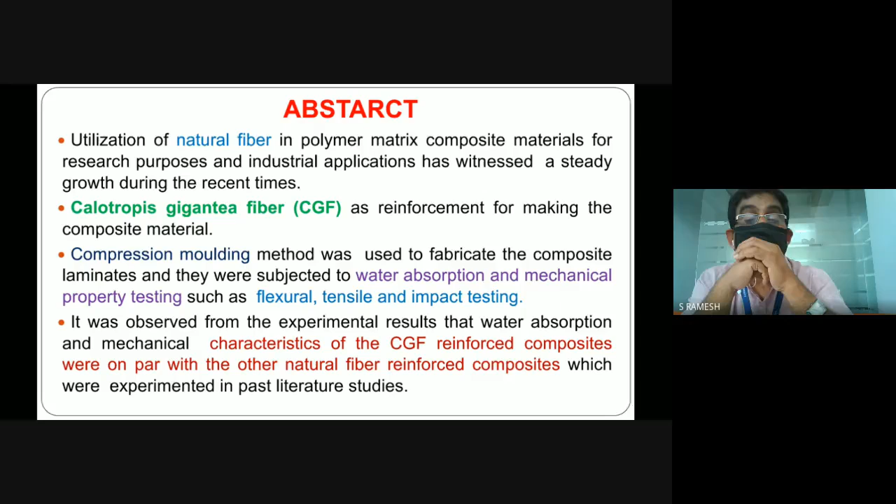In the compression molding method, we used to fabricate composite laminates that were subjected to water absorption and mechanical property testing, such as flexural, tensile, and impact testing. In this work, we take 4 tests: first the flexural, then tensile, and the impact test. For impact, we use the Izod impact test, and then we did the water absorption test.

What we observed from the experimental result is that the water absorption and mechanical characteristics of the Calotropis gigantea fiber reinforced composite were on par with other natural fiber reinforced composites experimented in past literature studies. In the introduction part, we discuss composites and what we are going to do.

Mainly we will take the Calotropis gigantea plant. From that we can extract 2 types of fiber: one from the bark fiber, and another from the seed fiber. Here we are going to take the Calotropis gigantea bast fiber.

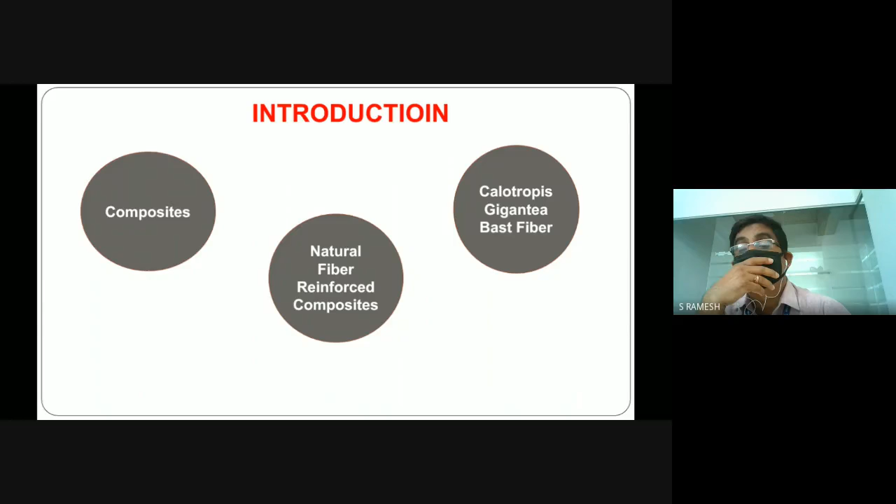And then we use LY556 epoxy resin and HY951 hardener. Why we choose this is because LY556 epoxy resin is a solvent-free resin, and it also gives a medium viscosity, which will easily penetrate into the fiber and give a better interfacial bond.

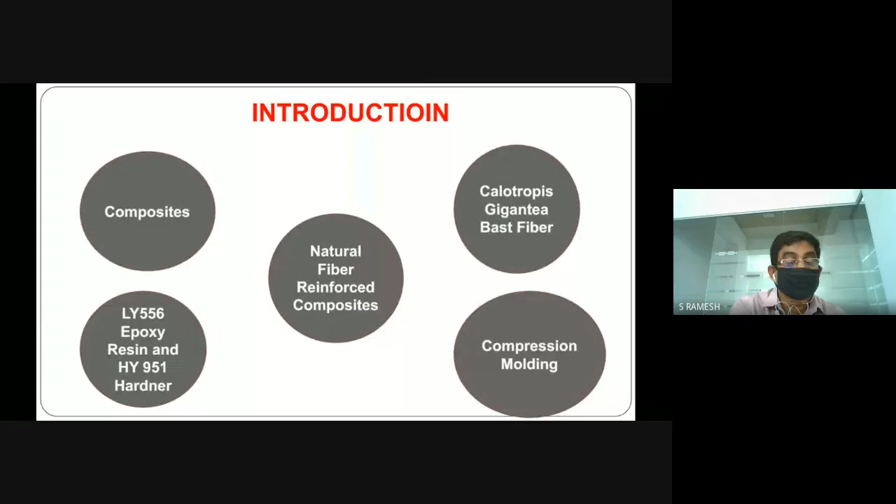We will take the HY951 hardener, which is able to get very high rigidity purpose, and mix it in a 10:1 ratio. Then we will go for compression molding. Most of the literature is done using the hand layup method, but we will go for compression molding to get a uniform load applied during fabrication throughout the entire composite laminate.

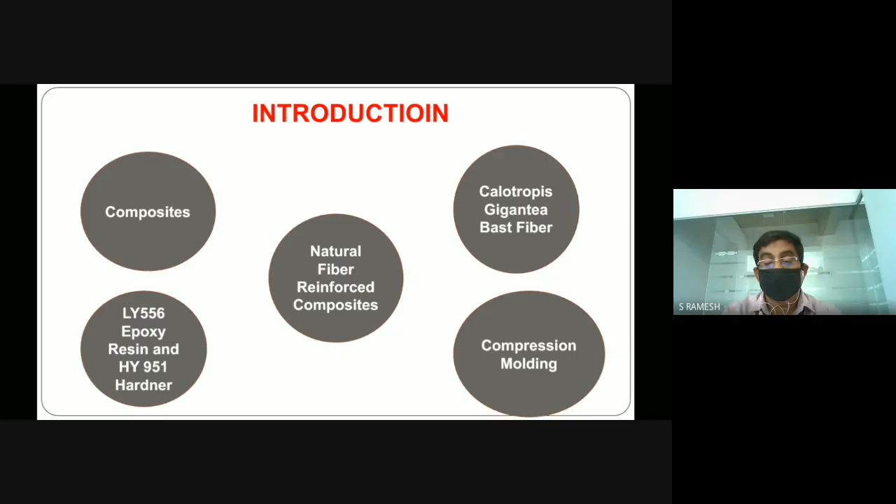Next, the flexural strength. As per ASTM standard D790, we prepared a specimen of length by breadth by thickness dimension of 125 by 12.5 by 3 mm thickness. We used a gauge length of 100 mm, applied a load cell of nearly 10 kilonewton, and the rate of loading is approximately 5 mm per minute.

Then for tensile strength, we used the ASTM D638-10 standard. We prepared a specimen dimension of 165 by 25 by 3 mm thickness, using a gauge length of 100 mm. We used a universal testing machine with a cross head speed of nearly 5 mm per minute.

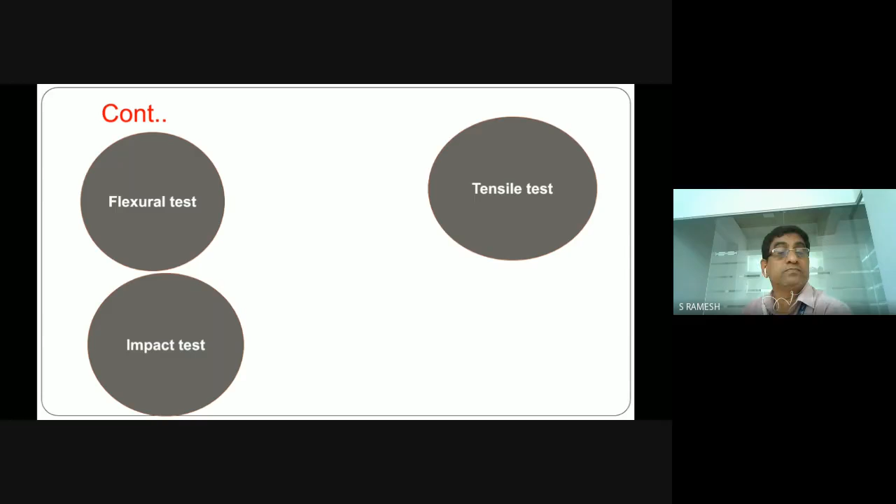Then the impact test. We used the Izod impact test, with the ASTM standard D256-10. The dimension of the specimen we prepared was 62.5 mm by 12.5 mm by 3 mm.

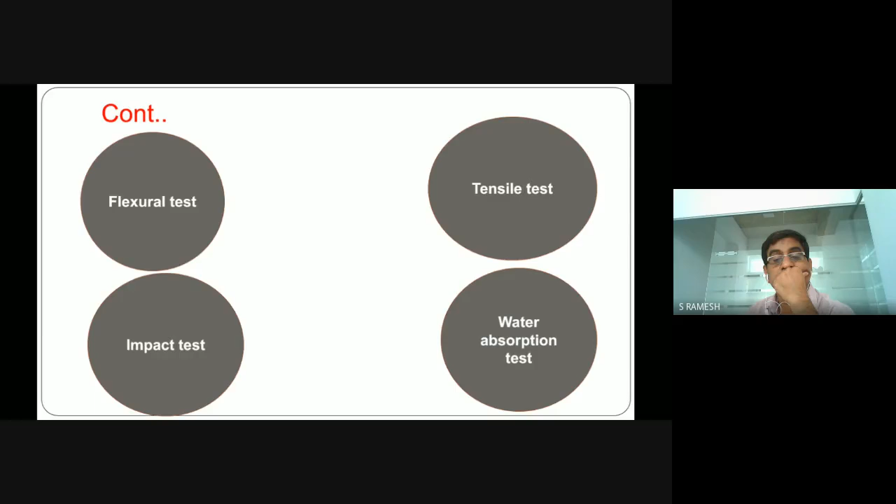Then we go for the water absorption test, using the ASTM D570 standard. We took an initial sample of 10 grams for the water absorption test. We calculate the water gain percentage as the ratio of wet weight minus initial dry weight, divided by initial dry weight, multiplied by 100. I will explain this elaborately during my experiment.

Next, the fiber extraction process. This is the Calotropis gigantea plant, which is available around Tamil Nadu. We chose it because it has least vegetative value and very low density, nearly 0.56 gram per cubic centimeter.

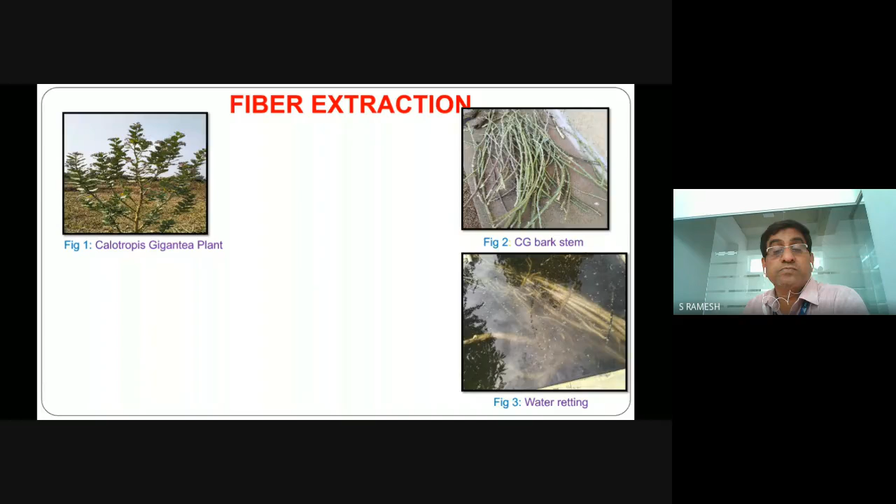We extract the Calotropis gigantea bark stem by removing the leaves and petioles to achieve the bark stem. Then we go for a water retting process to extract the fiber inside. We dip it in water for nearly 7 days, then take it for sunlight for 2 days. Due to this, water penetrates into the stem through capillary action, and the fibers come out slightly. Using a mechanical method, we extract the fiber after the water retting process, and finally we get a cumulative collection of Calotropis gigantea bark fibers.

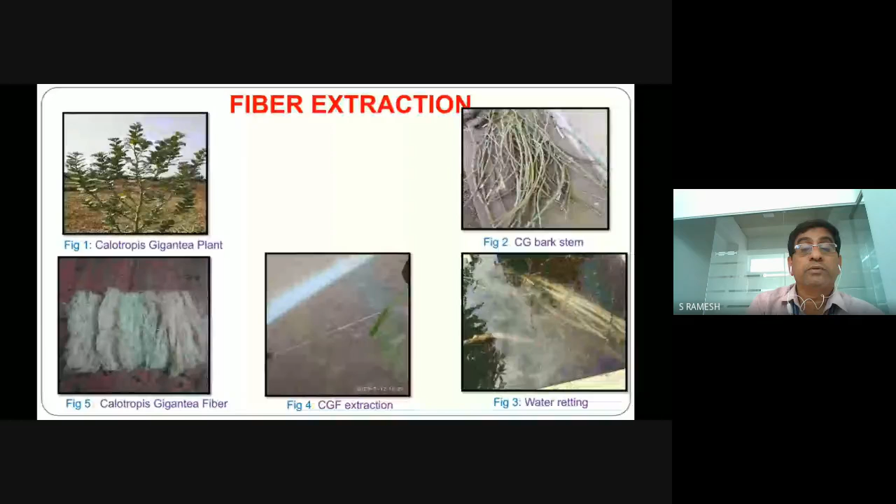Generally, from the Calotropis gigantea plant we can get two types of fiber: one from the fruit and another from the bark stem. For fabrication of composites, we used LY556 epoxy resin, which as I already told you is solvent free and has medium viscosity, along with the HY951 hardener, which has high rigidity. This gives us the final composite plate, achieved using a compression molding process.

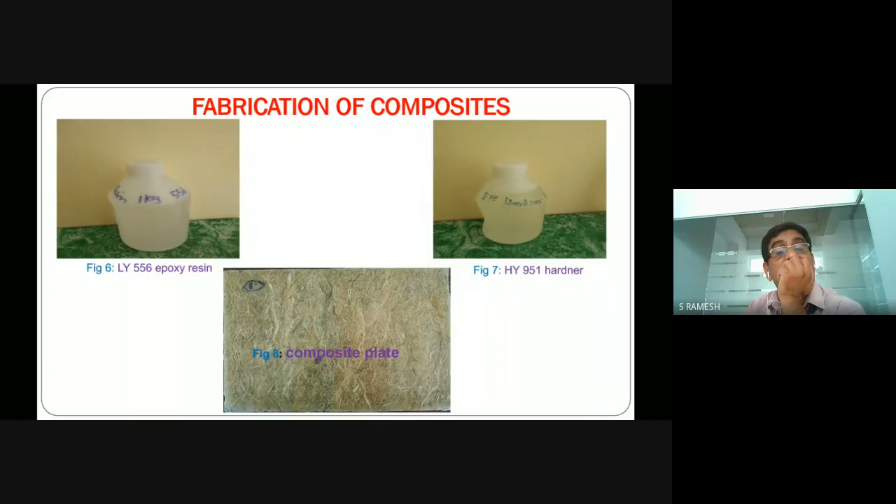This is a test result. First is the flexural strength and modulus of Calotropis gigantea bark fiber. Analyzing the figure, the flexural strength ranges from nearly 60 megapascal to 80 megapascal. Flexural strength is also known as modulus of rupture, defined as the stress in a material just before it yields in a flexural test. It normally ranges from 60 to 80 megapascal, as seen from the figure.

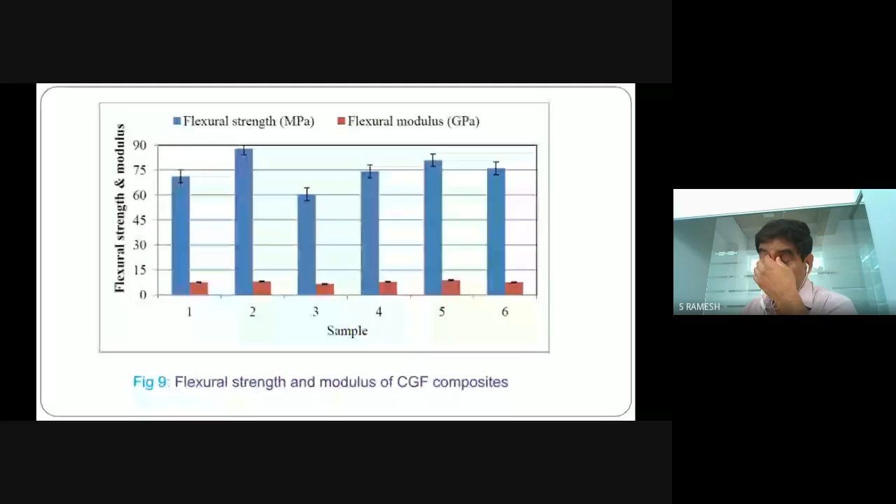When we look at the flexural modulus, it is nearly 6.55 gigapascal to 8.86 gigapascal. The flexural modulus is normally the bending modulus, an intensive property that is the ratio of stress versus strain under flexural deformation. The flexural modulus represents the tendency for a material to resist bending.

In the analysis, we will take nearly 6 samples. For tensile strength and modulus, the tensile strength varies from nearly 41 megapascal to 58 megapascal, as observed in the graph. Tensile strength means the maximum load a material can support without fracture when stretched, divided by the original cross-sectional area of the material.

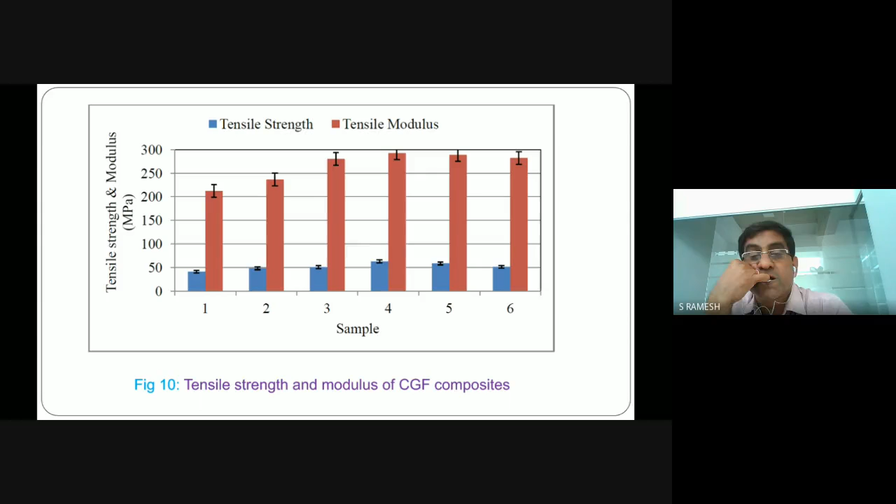For tensile modulus, we get nearly 212 megapascal to 292 megapascal. Tensile modulus is the ratio of stress along an axis to strain along that axis, where stress is force per unit area. We use tensile modulus to predict the elongation or compression of an object, as long as the stress is less than the yield strength of the material.

Next, we go to the impact strength. The highest impact energy observed by the Calotropis gigantea fiber composite is nearly 10.4 kilojoule per meter square, and the lowest impact energy observed by the Calotropis gigantea fiber composite is nearly 8.8 kilojoule per meter square.

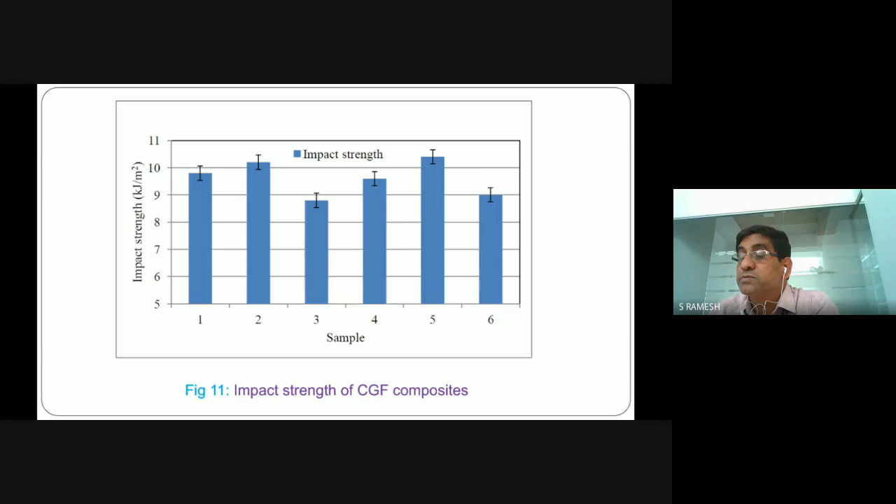In conclusion, the tensile strength and modulus were found to be better for Calotropis gigantea fiber composites due to enhanced load carrying capacity of the fiber. Second, the Calotropis gigantea fiber reinforced composite material exhibited better flexural strength and modulus, with values of 87.88 megapascal and 8.86 gigapascal respectively.

As already elaborated in the graph, the maximum impact strength recorded by Calotropis gigantea fiber composite is 10.4 kilojoule per meter square. From the experiment, it is concluded that the rate of water absorption of Calotropis gigantea fiber is higher than the composite, mainly due to the hydrophilic nature of the fiber. Overall, Calotropis gigantea fiber reinforced polymer composites are efficient materials and substitutes well suited for various applications in domestic, automotive, and interior and exterior components.

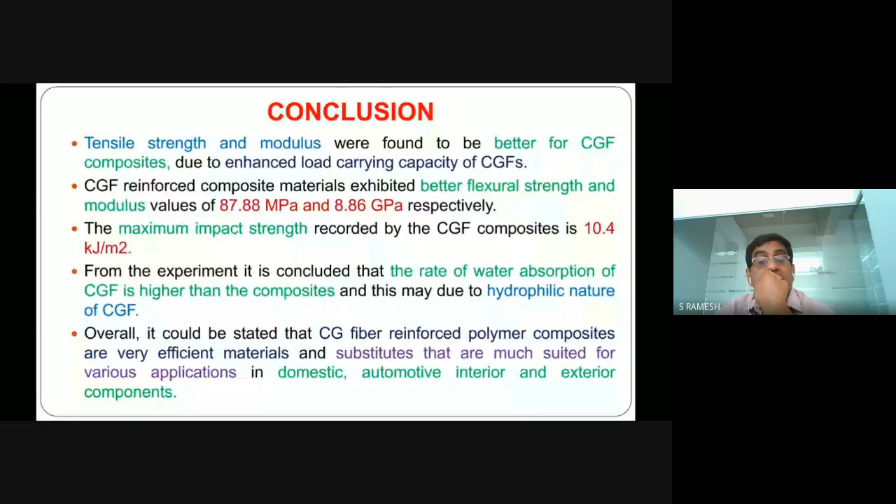These are the references we used.

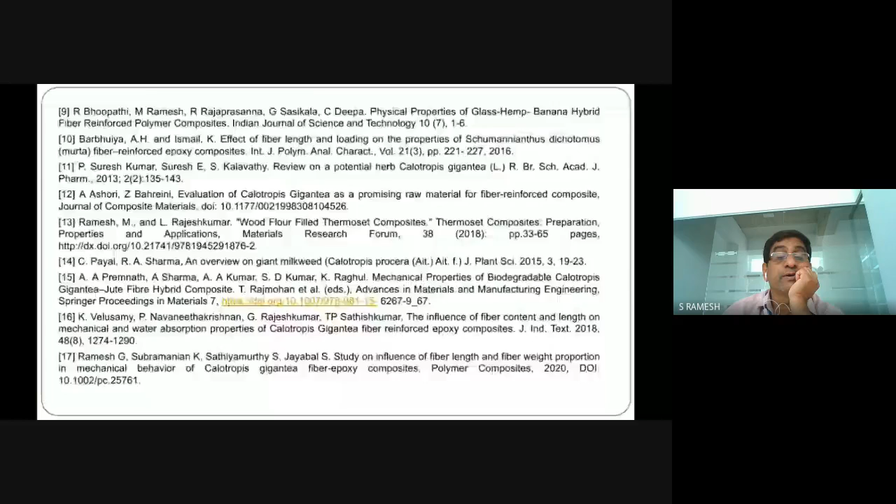Okay, Tamil Selvan. Yes, sir. Actually, go to the first page, first slide. Yes, sir. Abstract. No, the title. Here, actually, your name is Tamil Selvan and Ramesh is there.

Who is the real contributor for this work? Dr. M. Ramesh, sir. Okay, you are working in Kalyan Institute? Yes, sir, he's a vice principal. You are working as? An assistant professor, sir. What is your role in this work? I'm collecting the fiber, extracting the fiber, sir.

Okay, then I want just a simple thing: the water absorption test. So how do you conduct the water absorption test? Just for the people attending this session, can you tell them what water absorption is and how to conduct the water absorption test?

In the water absorption test, we use a water absorption tester machine. We take nearly 72 hours as the total water absorption time, and we record it every 4 hours. I will tell you in detail how to calculate water absorption from the graph.

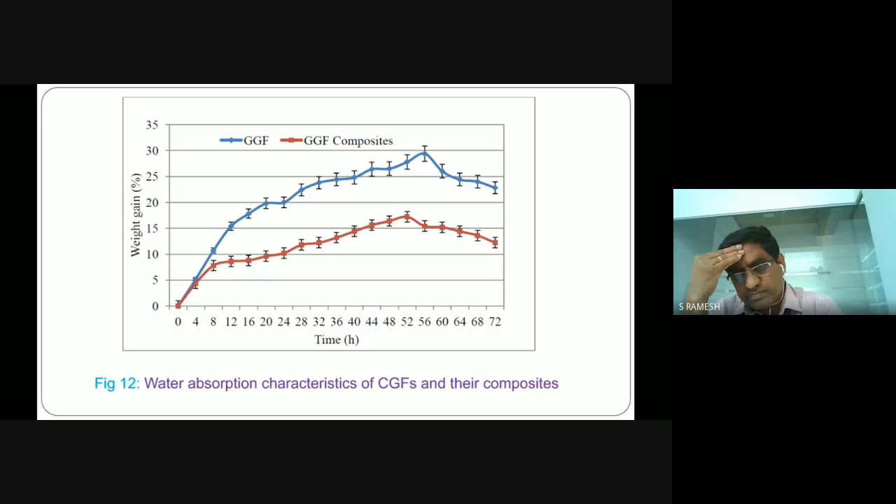And then we will calculate the wet weight and subtract from the initial dry weight, and we will get the weight percentage. This is actually the weight added in the composite. How much water is absorbed, and what's the capacity of water absorption? We have to calculate it as a volume fraction.

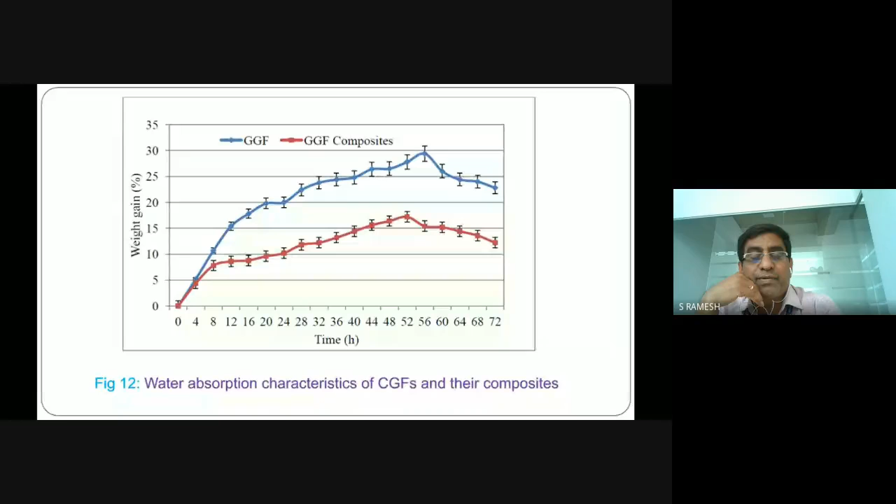If water contamination is added to the material, there is a possibility of other failures. Have you concentrated on those other failures? It may give strength, which is good, but at the same time, it may damage other functionality of the composite.

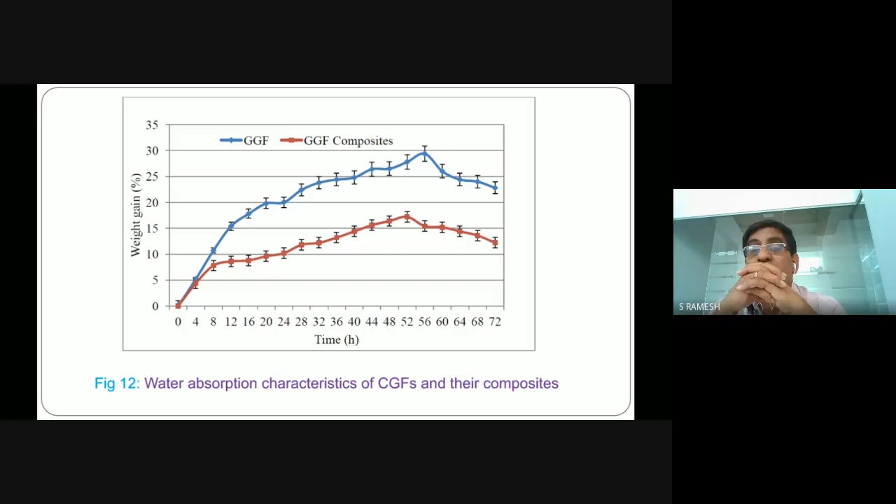When we talk about natural fiber composites, the tendency of the fiber is hydrophilic in nature. Mainly due to this hydrophilic nature, it absorbs more water molecules compared to normal glass fiber or silica fiber. So this is one of the drawbacks of fiber composites. We are trying to overcome this in further studies using sodium hydroxide treatment, a surface treatment.

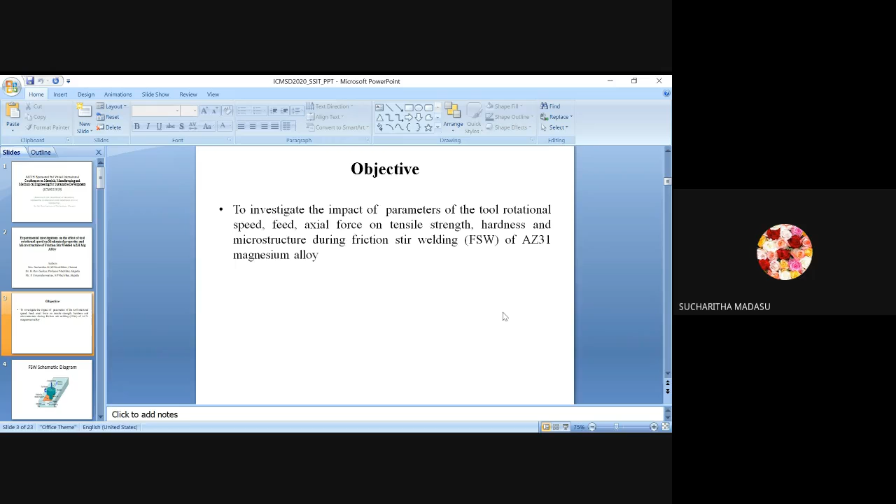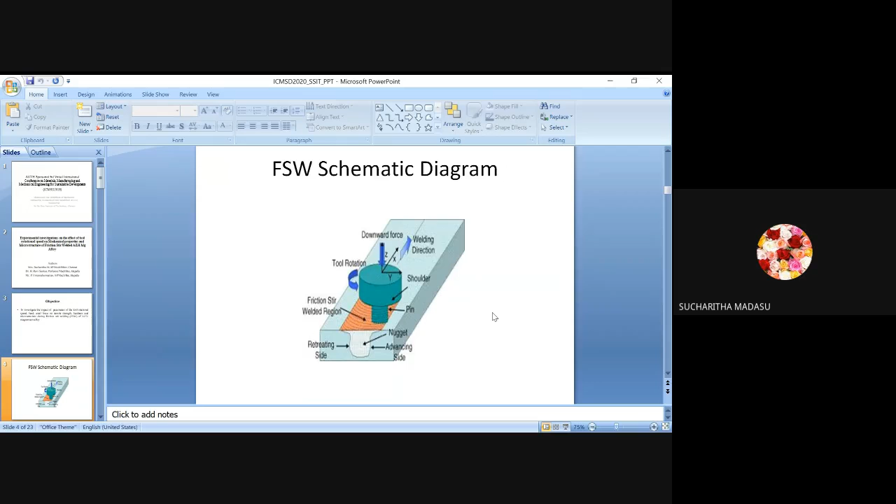This is the general diagram for FSW, friction stir welding. Here, the tool moves on the base plates so that friction develops between the tool and workpiece, causing temperature distribution on the surface of the plate, and the welding happens. So this is the general introduction - the friction developed between the tool and workpiece.

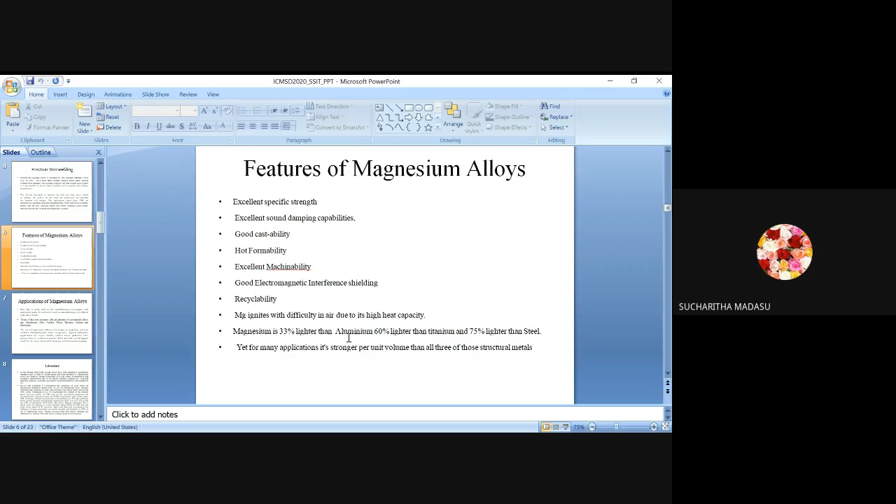Here I have taken magnesium alloys. Friction stir welding is used for all lightweight alloys. Much work has been done on aluminum alloys, so I have taken magnesium alloy as MG AZ31. General features of magnesium alloys: excellent specific strength, excellent sound damping capacity, good castability, hot formability, excellent machinability. Using all these points, we can replace aluminum alloys with magnesium alloys.

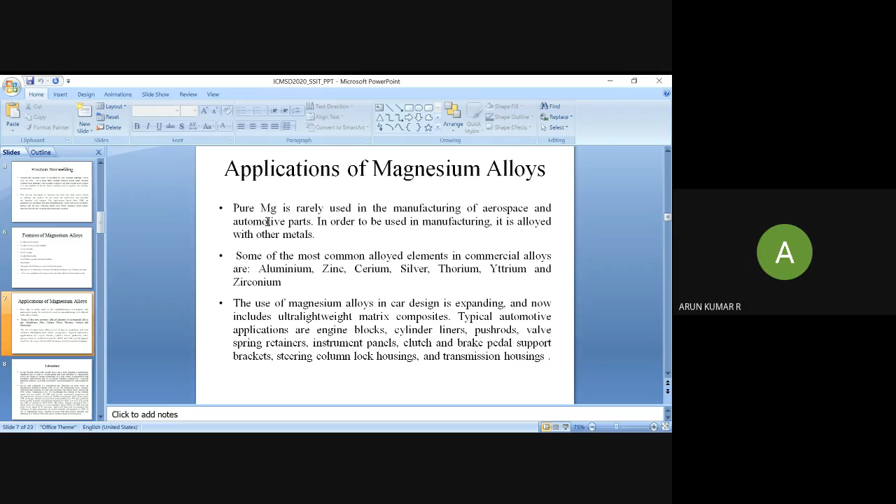So applications of magnesium alloys - please enlarge your screen ma'am, your screen is not that big, please slideshow. Is it okay sir? Yeah, fine, thank you.

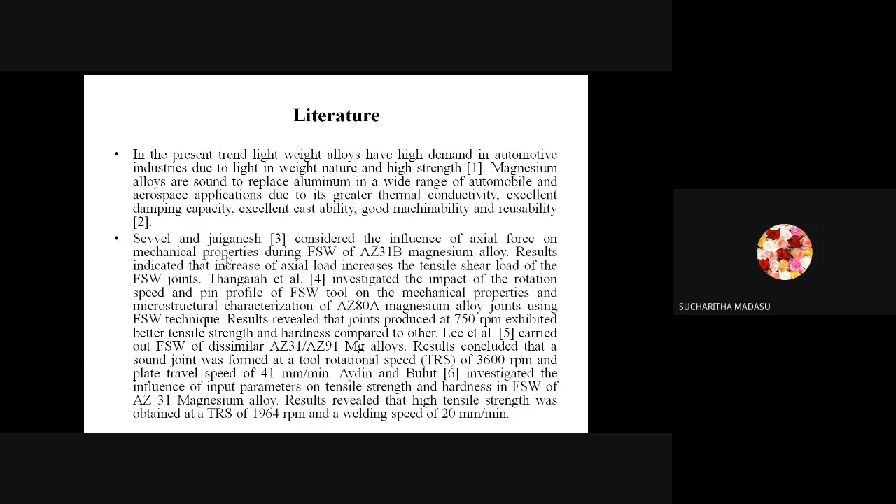So coming to my experimental details, here I have taken the tool as H13, and the tool dimensions I will show you. The pin diameter is 6 mm, the shoulder diameter is 18 mm, and the material I have selected is AZ31.

For this, the welding parameters I have taken are tool rotational speed as the only variable. Three different tool rotational speeds I have taken: 900, 1120, and 1400. The feed, axial force, and tilt angle are all constant: feed is 30, axial force is 5, and tilt angle is 1.

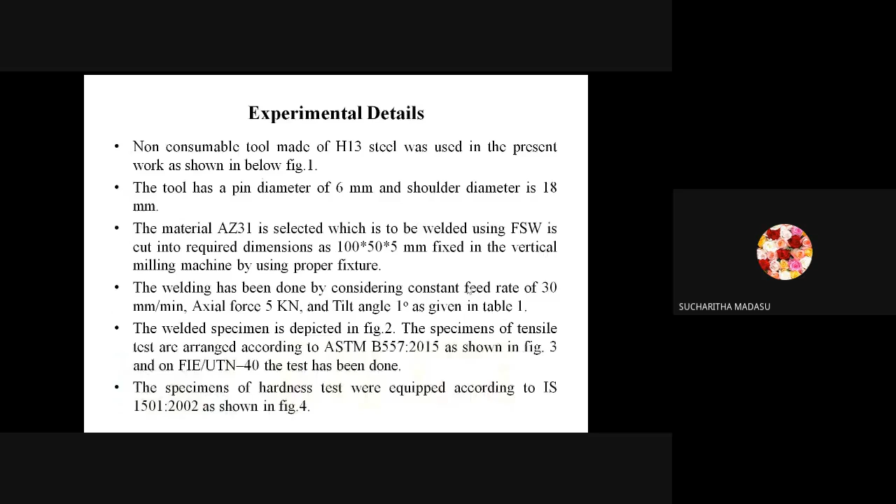After performing the tensile test on specimens at 900, 1120 and 1400 RPM, with constant feed rate 30 mm per minute and constant load 5 kilonewtons, I already have given that diagram. At lower tool rotational speed, TRS of 900 RPM...

Ultimate tensile strength of the joint is low due to lower heat input per unit length. Actually, the friction developing between the tool and workpiece, as the rotational speed increases, the temperature distribution on the surface of the plate also increases. So at lower speeds, the tensile strength we are getting is low.

At higher speeds, more than 1400, again the tensile strength gets decreased. Why? Because proper heat distribution should be there on the surface of the workpiece. So at a tool rotational speed of 1120 RPM, ultimate tensile strength of the joint is high and joint efficiency is also more.

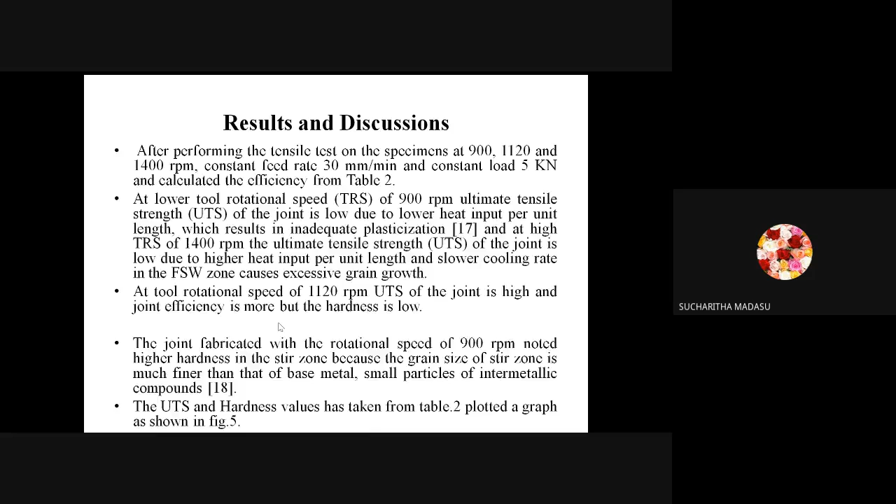And every area exhibits distinct capabilities of microstructure depending upon the thermal and mechanical situations. Actually, if proper temperature or thermal conductivity is appropriate, or proper distribution is there on the surface, there is no question of intermetallic compounds forming.

When the cooling rate increases, meaning when the tool rotational speed is reduced, intermetallic compounds will form. At that time, when we do the hardness test, hardness also gets increased, as I have shown in the values: at 900, 66.2; at 1120, 64.9; at 1400, 65.5.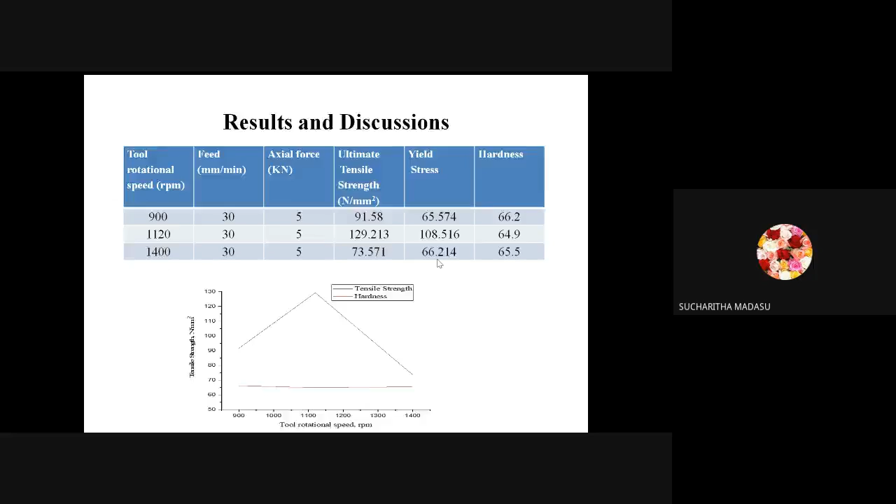And here, the thermomechanically affected zone, where the combined outcomes of thermal and plastic deformation have been energetically composed of the unique dendrite grain shape. Where the temperature distribution is proper, we can get the dendrite grain size, and the ultimate tensile strength also will be more because of the grain size.

The unique dendrite shape has completely disappeared. Actually, when starting the friction stir welding, the tool pin, which we have taken as 6 mm diameter, fully merges with the workpiece. So if we use more speed, the pin may vanish.

And here I have taken some analysis, for 900 as well as 1120 only. Why? Because at 1400 I got very low tensile strength, so I have gone with 900 and 1120. Actually at 1120 I got good tensile strength and good microstructure, with dendrite grain size as already informed.

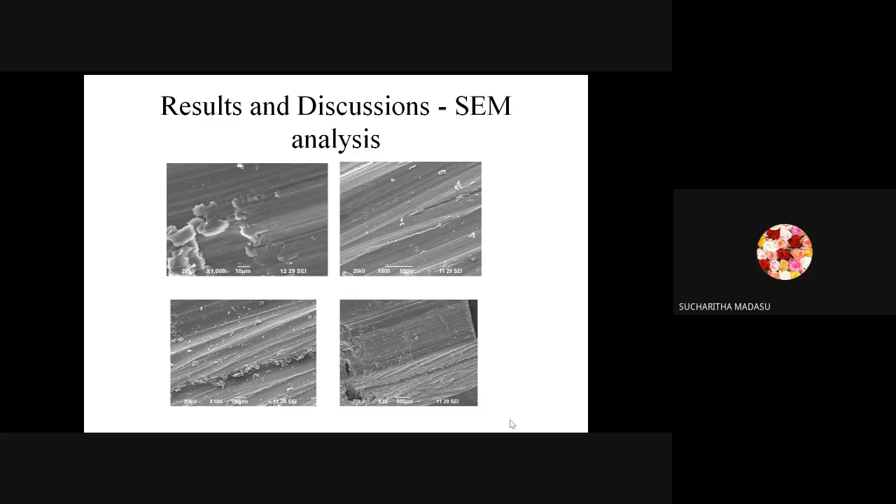I have taken this EDAX also, energy dispersive X-ray analysis, showing aluminum, magnesium, intermetallic compounds, and ferrous oxide. Ferrous oxide and aluminum-magnesium compounds peaked at a tool rotational speed of 1120. The intermetallic compounds have a needle shape, causing increased stress concentration, which at higher speeds may lead to loss of strength.

The higher rotational speed causes release of stored material to the upper surface. This happens during friction stir welding and produces micro voids in the stir zone, which may be one reason for lower tensile properties, as discussed for both 900 and 1400 RPM. Joints at lower rotational speed of 900 result in lower tensile properties due to lack of stirring and lower heat input, which occurs when the tool rotational speed is less.

It is observed that the joint fabricated at a tool rotational speed of 1120 RPM exhibited higher tensile strength. This may be due to optimum heat generation, which is sufficient to cause free flow of plasticized material and adequate mechanical work.

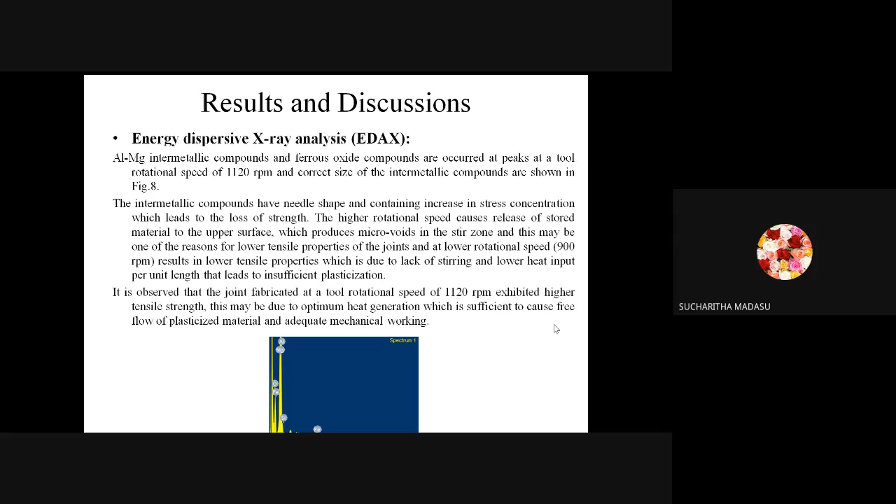Here are the conclusions. High tensile strength was observed when the joint was welded at a tool rotational speed of 1120 RPM, compared to 900 and 1400. The grain size reduction also showed appreciable change at the speed of 1120. Due to this appreciable reduction in grain size, high tensile strength was noted at 1120 RPM. So, compared to lower speeds or very high speeds, moderate speeds are better for achieving high tensile strength, good grain structure, and hardness.

And these are the references I have taken.

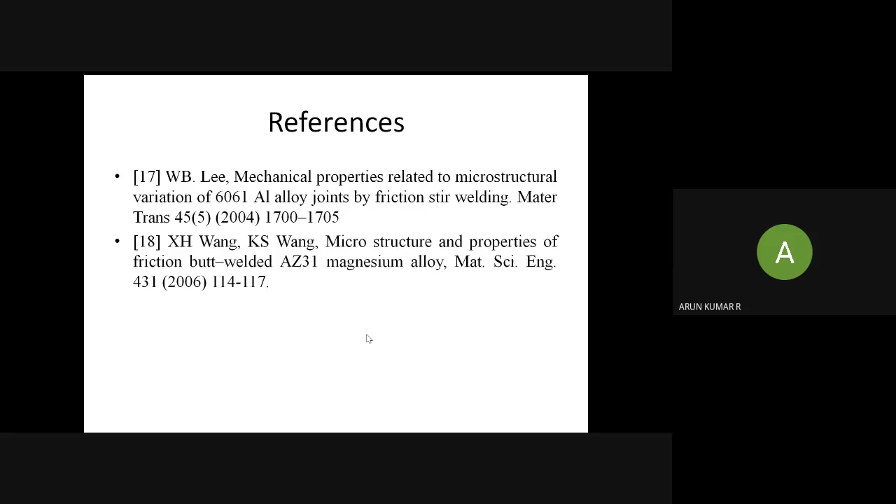Ramesh sir, yes sir. Myself Abhay Gupta. Yesterday because of some problem, I could not present my presentation. Can I present right now? Arun Kumar sir, how is the availability? I will check, sir. Okay, Gupta sir, please, for 5 minutes. I will inform, sir. Okay, sir, please.

Sucharitha, what is new in your work? Tell me. Sir, actually there has been a lot of work done in the field of friction stir welding. So what is new in your work? Actually, I have started this work moving toward submerged friction stir welding of magnesium alloys. Before that, I started this one as a trial test.

Trial test, yes sir. I am going to compare normal friction stir welding with submerged friction stir welding using water as well as nanofluids. I am doing that work also.

Just last month I submitted one review paper on this topic. Before going to that work, I want to confirm whether it is increasing or not at moderate speeds. Okay, because this is only preliminary work, but you need to go for submerged stir welding, yeah? That I have already completed also, but it is still in testing conditions, sir.

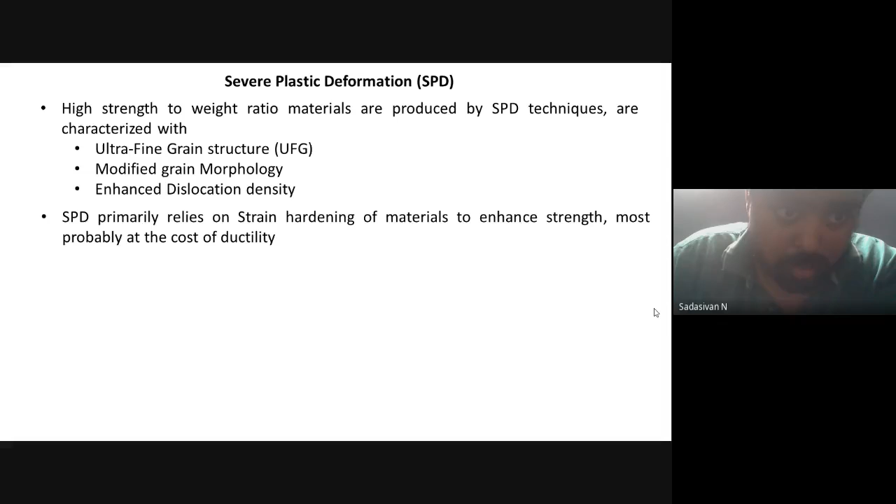This field, severe plastic deformation, relies on a strengthening mechanism. We strengthen the material by means of strain hardening. The material that we put through this process comes out with an ultrafine grain structure, and the morphology of the grain totally changes with enhanced dislocation density. That is how the material normally gets strengthened, and we can go up to even nano range of grain sizes. So I've given just a definition of what strain hardening is.

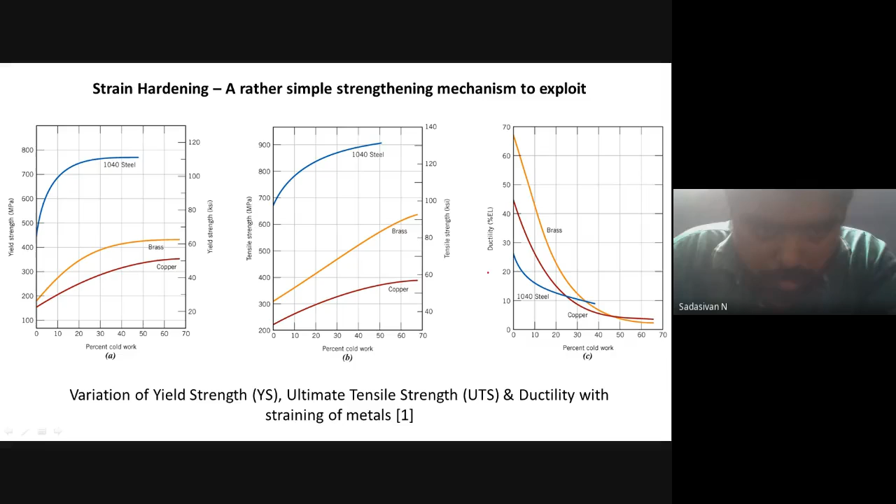So these are some plots of what happens to a material when I put it through plastic deformation. Let's take an FCC metal, copper. If I process it to some plastic range, say 10 percentage of cold work, I get a significant enhancement in the yield strength and tensile strength, but it is accompanied with a drop in ductility. That is a very undeniable fact, we lose some ductility for that. So it depends on our application - we can tailor make materials with required properties. We can take a metal and make it stronger.

There are a variety of severe plastic deformation processes. I have listed a very few that I know - there are hardly around 55 to 60 SPD processes available. I am primarily working on equal channel angular pressing of aluminum series alloys. There are many other methods available, but the problem is most of these methods concentrate on processing bulk material.

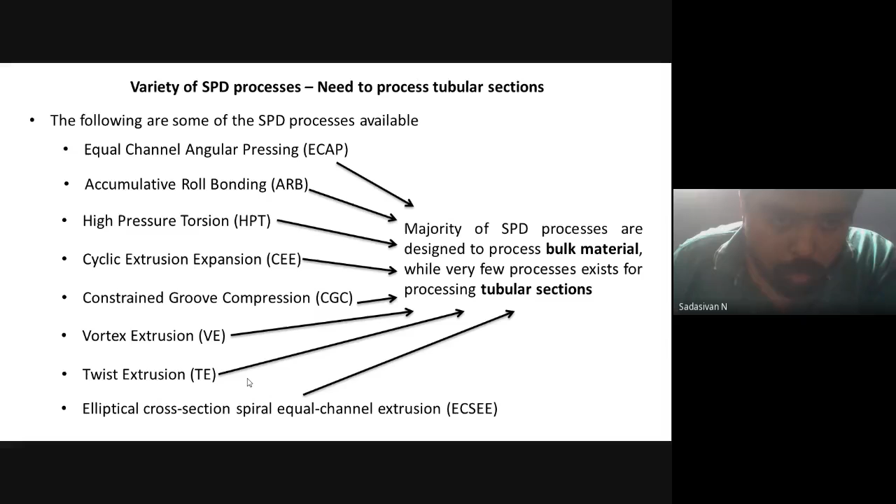Industrial application of tubular materials is very high. When I make a tube of stronger material, the material is much stronger, so I can reduce the wall thickness. That is the aim of making a tubular SPD process. So I thought of doing a small review on the processes available in the current literature for doing tubular processing.

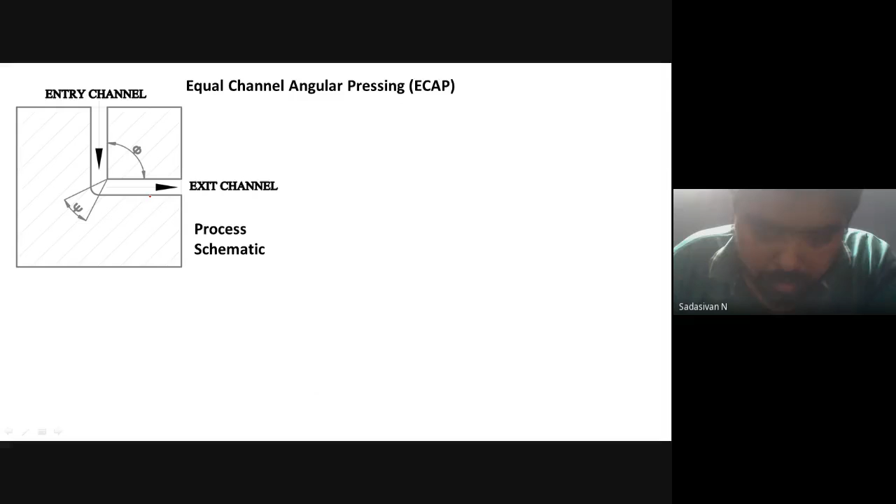This is my area of research, equal channel angular pressing. It consists of an entry channel - you put a workpiece into this and close the die. It's a symmetric die, mirror symmetric two split die. You apply load with the punch, and the material gets sheared out. This creates a lot of grain refinement and grain elongation. One pass of ECAP is not good - the cross section remains constant, so we can keep repeating this process. It can be done consecutively in the same fashion, or the workpiece can be rotated between processes, creating a difference in grain morphology. A number of variations are possible in this process.

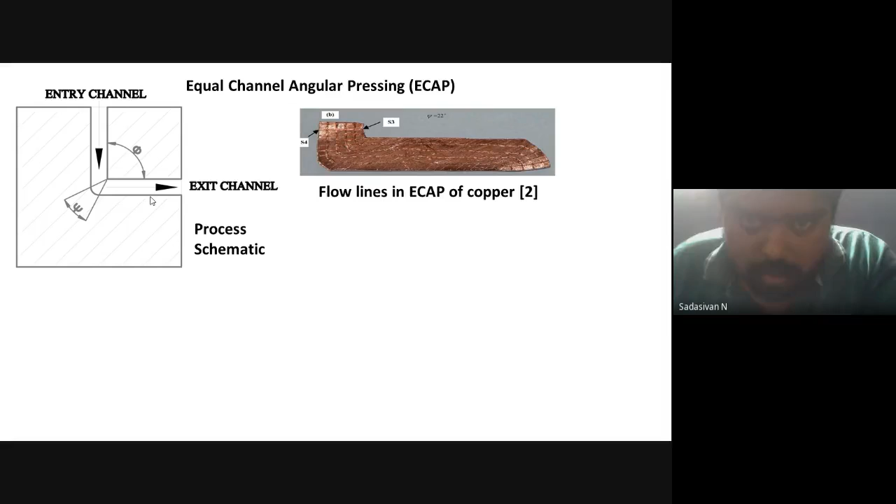This is everything I am showing from literature, it's not mine. This photograph is taken from my reference, showing the material flow pattern, how the material flows. A grid was inscribed and then subjected to ECAP. It's something like a real-time FEA, showing us how the grid starts and how the process happens.

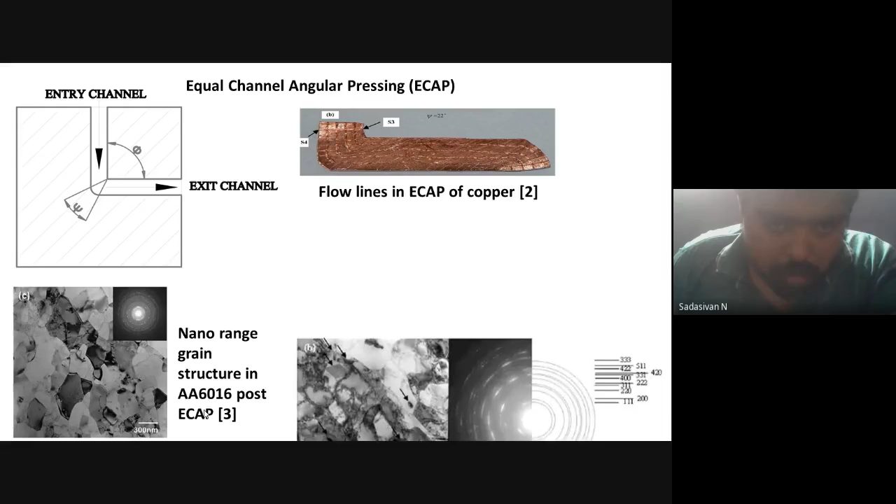Now why am I talking about this process again? This equal channel angular pressing was modified to perform tubular material processing. So first, let me explain what ECAP is. It gives us a nano range grain structure with considerable results - with 3 to 4 passes we can go to the nano range of grain size, which gives substantially high mechanical properties. But the problem is you always lose the ductility.

We can see in the image the pileup of dislocations near the boundaries and the initiation of subgrains forming. If we keep processing multiple times, these subgrains in turn become individual grains, and that's the mechanism of grain refinement. All these dislocations that get piled up add to your strength - that is grain boundary strengthening.

It's another method of making a material stronger. All these images are taken from the references I've quoted. In this SAD pattern also, we can see a variety of texturing is happening.

The materials are straining. If we keep repeating the cycles, the stretching of grains happens in almost a variety of directions. So that SAD pattern tells me what are all the dominant Miller indices, the Miller directions in which your grain is getting aligned. Too much texturing in a single direction will make your material weak in a particular perpendicular direction.

So this ECAP was modified in a way. A tubular material was taken and filled with sand, and it was processed by ECAP using commercially pure aluminum tubes, 20 mm diameter, 13 mm internal diameter.

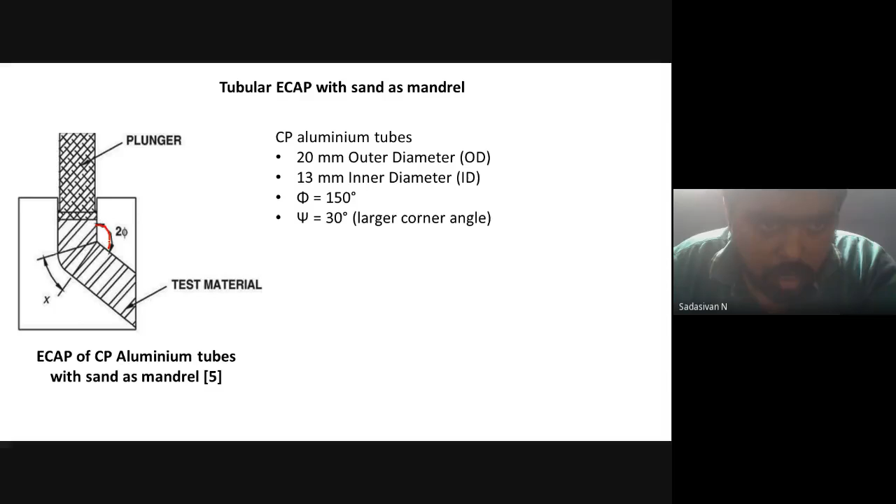This process parameter here, it's not 2 phi. This is the angle between the L channels, called phi. In this paper they have used it as 2 phi, but generally it is called phi, 150 degree, and this is your 30 degree. Normally this is around 10 to 15, but here they have kept it very large because you are putting sand inside, and it's going to create a huge burden on the press. So they have given a high amount of fillet for you to go. This is normally called the corner angle, and this is called the channel angle.

Plastic strain is imparted, but there is no change in cross section of the material. So normally we cannot measure the strain here, but we can analyze it and find it out by numerical methods and finite element simulations, and then validate the simulation by taking micro hardness values across the cross section. The trend of variation can be compared with the finite element strain contour, and we can validate our simulation. That's how people normally validate their FEA simulations with real tests, because we cannot directly measure the strain here — it's non-measurable, no cross-section change.

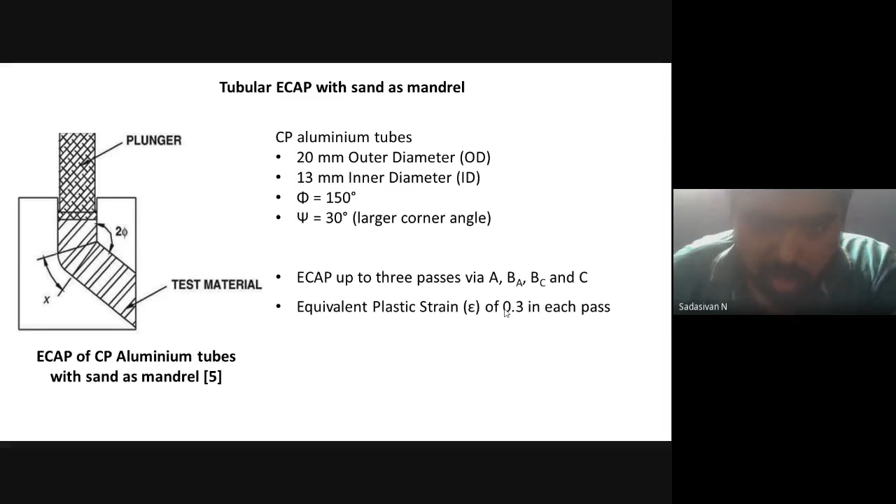Same cross-section is maintained after the process. Strain is not measurable here, but it comes around 0.3 plastic strain imparted in each pass of this process. I'm restricting my discussion to the process methods and a few accompanying mechanical properties. I'm not going into microstructure.

These routes were followed, and it was found that route BA gave the highest amount of hardness, though it was quite comparable — not much difference in the processing route. Processing was carried out only up to 3 passes. So this is one method to perform hollow ECAP.

The second method is an integrated extrusion ECAP, where a small extrusion happens before your ECAP actually. There is one extrusion happening here, a small reduction in diameter, after which you can have one pass of ECAP and the next consecutive pass here. Here you have one shear, and the second shear is happening here.

So what I do is take a copper tube, and it is fitted with a lead core. Because you cannot directly plastically deform a tube, it will buckle when it changes direction. It will break, shear, or some type of failure will occur on the walls of the tube. So we are fitting in a lead core or lead mandrel, and it is processed along with the lead, which is a sacrificial part — you have to throw it away. You can melt it outside very easily.

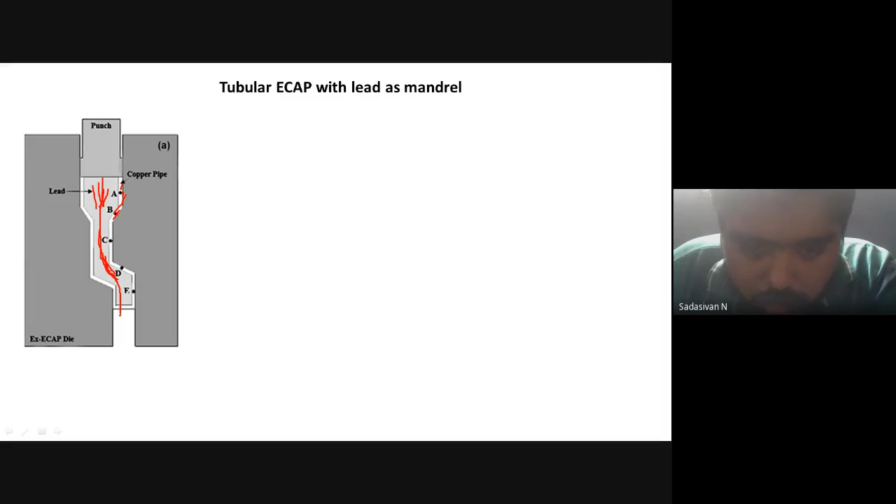So this method was followed for performing ECAP of copper tubes: 14 mm diameter tubes, 2 mm wall thickness, with lead used as the core. Extruded from 14 to 7 mm in the first step, imparting a 1.4 plastic strain. Then 2 consecutive ECAP passes, each imparting a 0.8 plastic strain. The die used here has a channel angle of 120 degrees and a corner angle of 0 degrees.

It's a very sharp corner, 0 degree. So the total cumulative plastic strain imparted here is 3. The higher the plastic strain, the better will be your strength enhancement, strengthening — but along with that, you will lose your ductility.

So you have to know where to stop. That is very important.

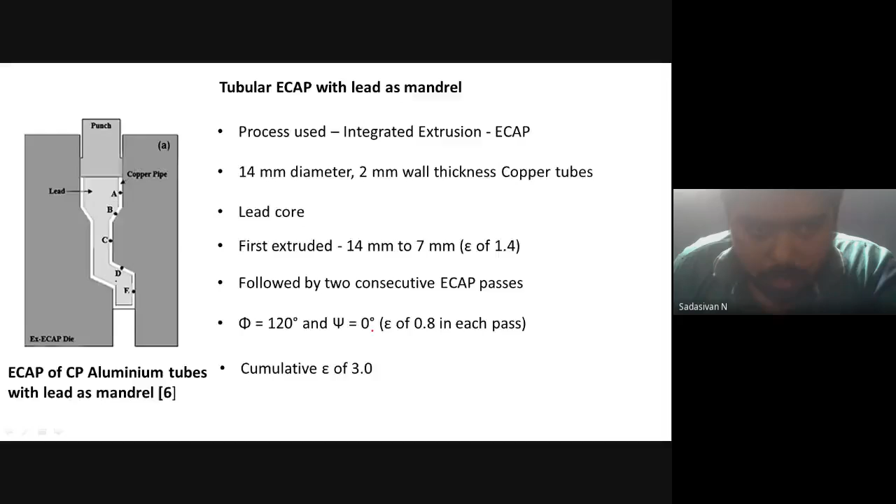Tubular ECAP with another method where I fit the ends of the tube with threaded lids, and I fill it with SAE 30 hydraulic oil, and then I do the same. It's somewhat similar to the first method, but here instead of sand, I am putting in hydraulic oil.

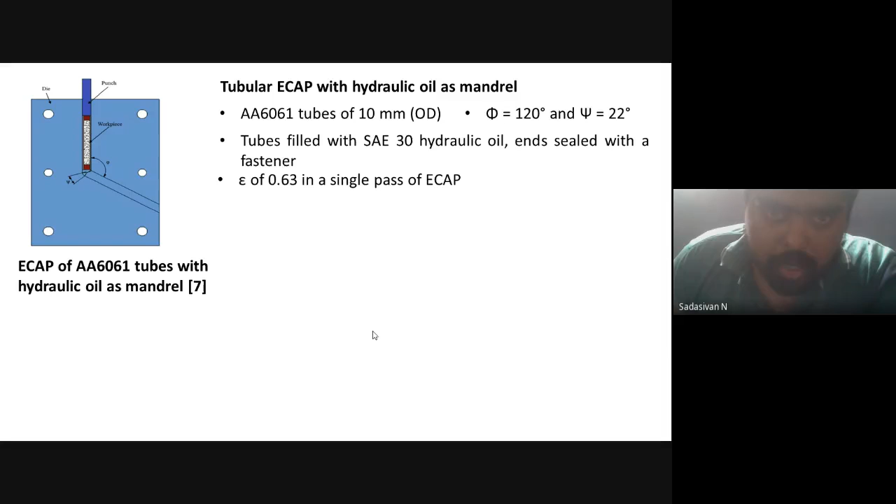Here 6061 tubes, 10 mm outer diameter, were processed in an ECAP die, 120 degree channel angle and 22 degree corner angle. Tubes filled with SAE 30 grade hydraulic oil. Each step of ECAP imparted a 0.63 magnitude of plastic strain.

So after ECAP, I am performing a T6 heat treatment. The parameters are given here: 520 degrees Celsius solution treatment, after which I water quench, and then artificial aging at 8 hours at 170 degrees Celsius.

The hydrostatic stress present inside the tube actually didn't work out the way they thought. It led to a small ovality in the cross section. Thinning of the tube was found at the tail, and thickening was happening near the head section. Some work has to be done on this, continuing this work, to refine the process.

So the testing of this material was carried out. Shear strength - I mean, the torsion test was carried out because tensile test was not done in this particular work. They did the torsion test. So yield shear strength and ultimate shear strength improved, some 250% improvement in yield, and 140% improvement in ultimate shear strength was found after this ECAP.

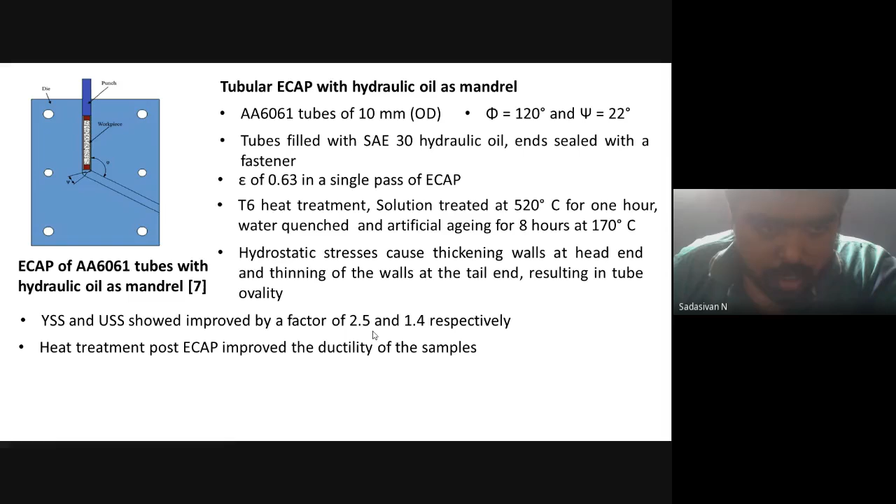Heat treatment further improved the ductility of the sample. Strength is meaningless if you have very brittle material. Of course we can improve the strength, but you cannot lose all the ductility. So hardness values improved by a factor of 2.1, that is 210% improvement. Further improvements were possible after heat treatment because of the 6 series alloy, a heat treatable precipitation hardenable alloy.

This is a... I believe I have some more time.

HECCAP, actually it's like a hollow extrusion. The workpiece is forced to flow through, the entire container is filled with oil. I press the billet and make it flow outwards, so that I end up with a tube of a larger diameter. So here you can see there is one ECAP pass happening here and another ECAP pass happening here.

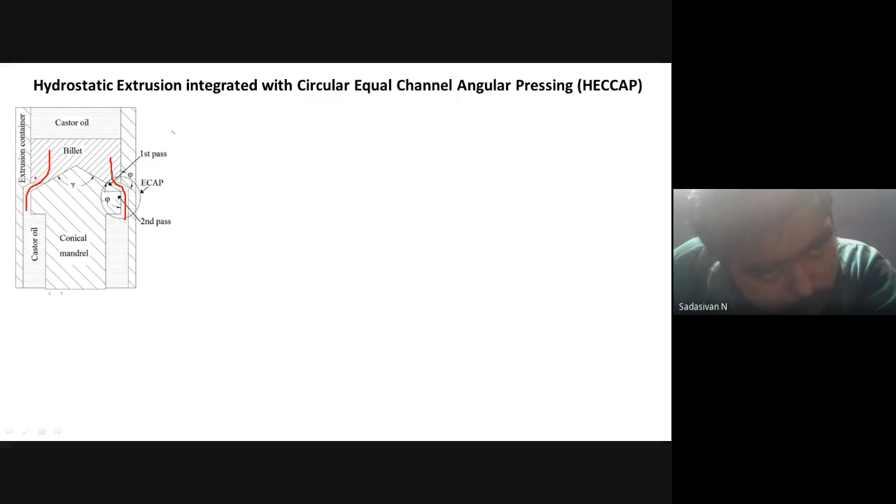So this is a, what is it, outward flow ECAP, hydrostatic reverse back pressure was applied on magnesium AZ80 alloy. 60 mm billets of 400 mm length were taken, and this billet was formed at 290 degrees Celsius forming temperature, because magnesium is brittle and it's difficult to form it at room temperature. We need 290.

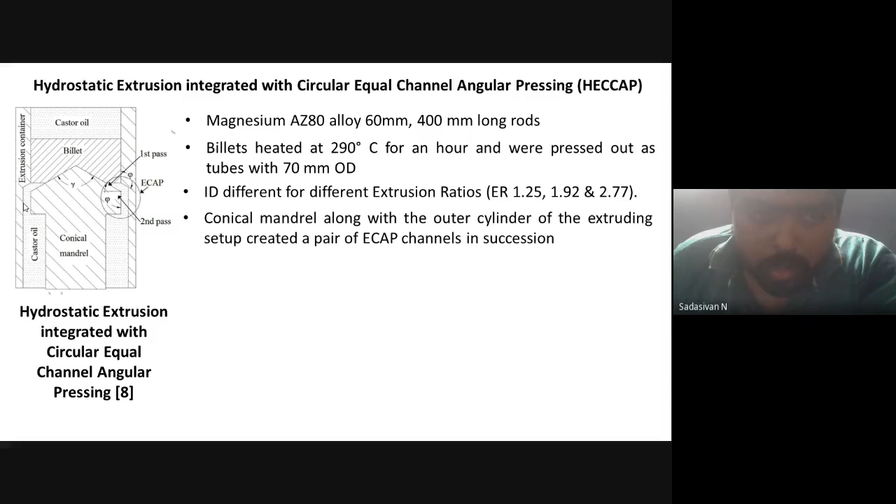So 3 different extrusion ratios were used, bringing out tubes of same outer diameter but different inner diameters. A conical mandrel was used to create that obstruction for extrusion of the tube. Extrusion container was heated, temperature was maintained at 220 to avoid chilling at the die contact surface.

The highest extrusion ratio produced some good strength enhancement. 308 MPa yield strength, 335 MPa ultimate tensile strength, and percentage elongation of 7.2, which is good for magnesium. It improved because of the hydraulic back pressure that this castor oil is giving. Here, if you can see, this entire thing is filled with oil. There is some back pressure exerted, which is homogenizing the forming load.

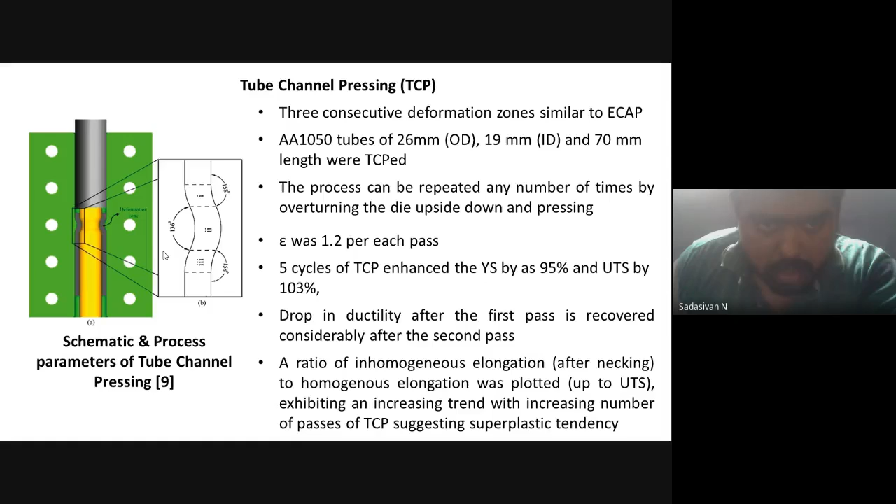So the next process, here actually 3 different forming steps happen in a single go, and this can be repeated by rotating the die upside down. It can be done any number of times we want. Something similar to this, but the corners of the die are very sharp. Here it's called tube channel pressing.

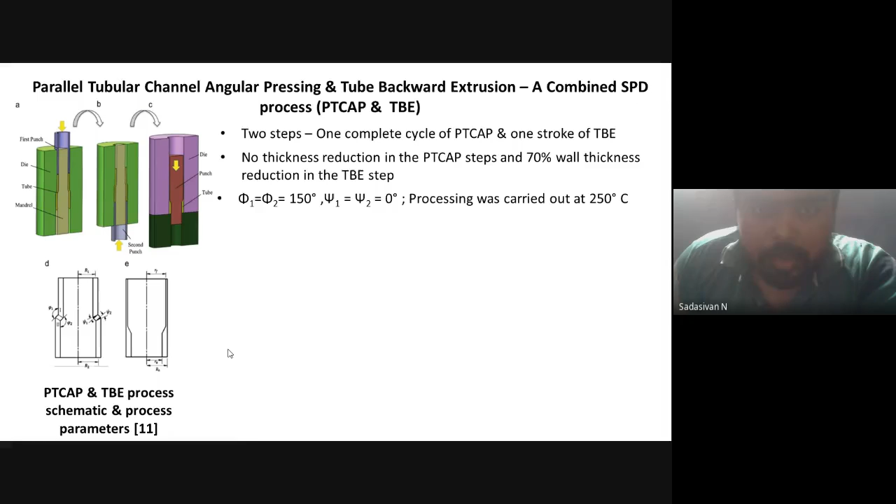It's a combined technique where parallel tubular channel angular pressing, the first method with the 2 green dies, and the last one is a tube backward extrusion - 2 methods were combined together. Magnesium alloy 20 mm tubes are processed in this, and they were found to produce good results. This combined process produced 133% enhancement of yield strength, 26% of ultimate tensile strength, and a drop of ductility of 12%.

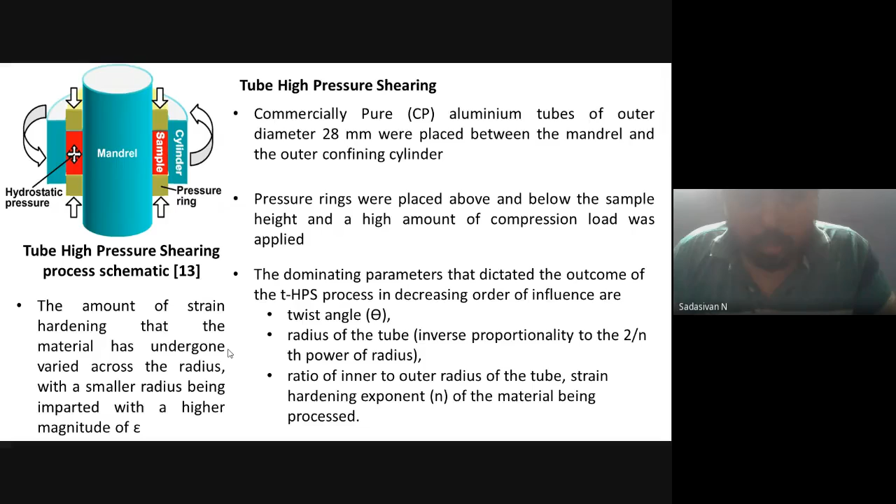So it's a direct process, very short tubes. Again, why I've reviewed all these things - what I found out is that there is a lot of research gap available if we can start working on these, because tubular products are used every day. So there is a lot of research scope available in these cold forming areas. So much of work is left uncontinued, so much research gap is available for people to come and start. That's what I found out by doing this small review.

Due to the restriction on the length of the article, I was unable to include the metallurgical aspects of this work. It is even more interesting if we look from the metallurgical point of view. So I'll stop here, and I'm happy to answer if there are any questions.

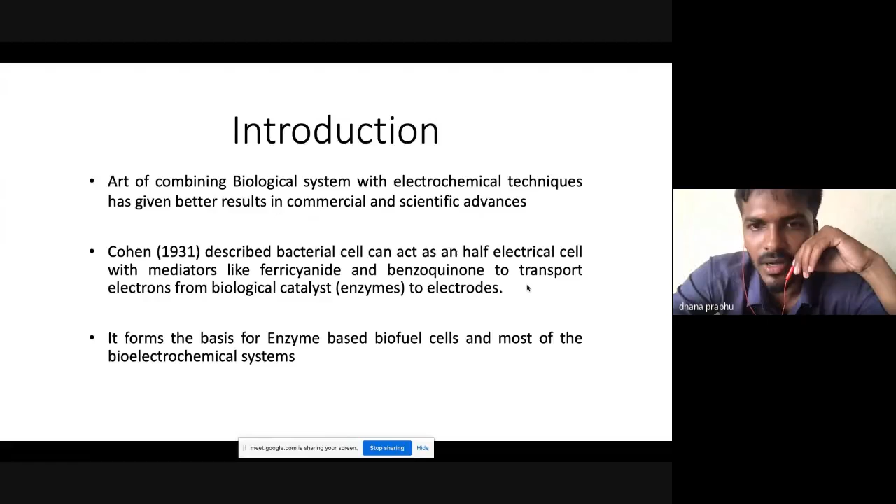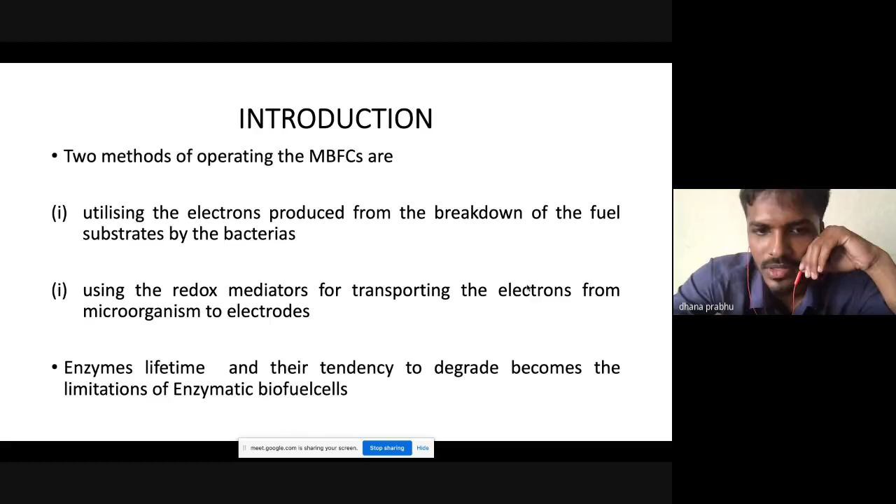We are going for the mediator electron transfer also, where the direct transfer is not possible or somewhat tough. In enzymatic biofuel cells, we utilize the electrons by breaking down the fuel substrates through the enzymes, and then transfer the compounds, that means electrons, protons and molecules, to the fuel cell through the mediator or without it. If we are not using a mediator, the active center should be closer to the electrodes for better transfer of electrons without losses and for better efficiency.

We give fuel substrates to the enzymes at the active centers. The enzymes convert the fuel substrates into products, and the product is transferred to the fuel cell, that means the electrodes, and then to the cathode. During this transfer process, electrons are given to the outer circuit where we need electricity.

We are using two types of enzymes: oxidizing enzymes and reducing enzymes. At the anode we use oxidizing enzymes, and at the cathode we use reducing enzymes.

For immobilization, as already discussed, we should immobilize the enzymes. When the enzymes are in movement, there is a lot of chance for loss of electrons, or the reactions may get delayed. So we go for immobilization, using four types of techniques: adsorption, entrapment, cross-linking, and covalent bonding.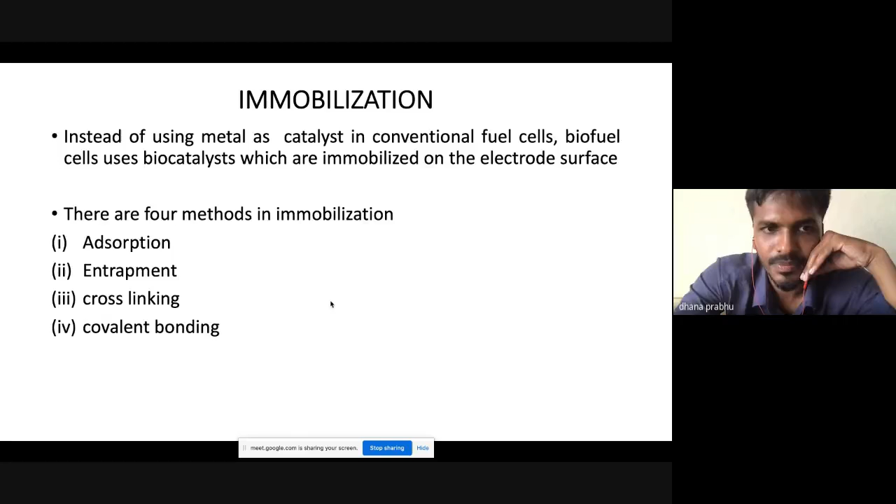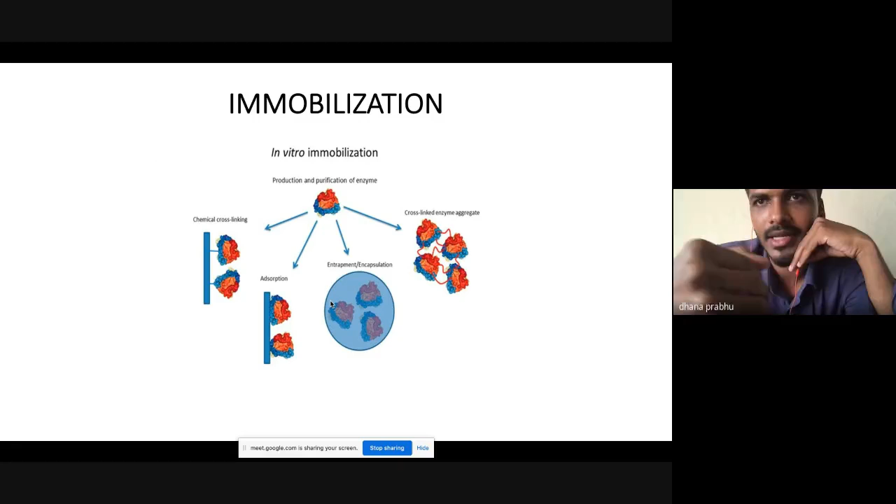So we go for different methods: entrapment, cross-linking, and covalent bonding. In the adsorption process, since we are dipping the electrodes inside the enzymatic biofuel cells, the enzymes may not stick well, immobilization will be very low, and the enzymes may mobilize and dry up. So we go for chemical cross-linking and entrapment, totally locking the movement of the enzymes and making them stand in place, so the fuel substrates can be easily converted and the electrons can easily move to the electrodes.

So the electrons transfer after converting the fuel substrates. Once the enzyme has been immobilized and the fuel substrates converted into products, we have to transfer the electrons to the electrodes, using either direct electron transfer or mediator electron transfer.

In direct electron transfer, the active center should be at the center of the molecule, so it is easy for the fuel substrates to convert into products, and the electrons can be easily transferred to the electrodes.

In mediator electron transfer, there are two types of layers: mono-layer and multi-layer structures. In mono-layers, we use enzymes and then a mediator, which acts as an oxidizing mediator. It transfers electrons when the active center is at the edge of the enzyme, meaning we have to use mediators for transferring electrons to the fuel electrodes.

The mediators should be very efficient and should also be immobilized for better movement of electrons. We choose the mediators based on the enzymes, which have to support the reactions, and there should be no interreactions.

So we go for mediator electron transfer, but as far as efficiency is concerned, direct electron transfer is better for the process, and mediator electron transfer can be used where direct electron transfer is not usable or avoidable.

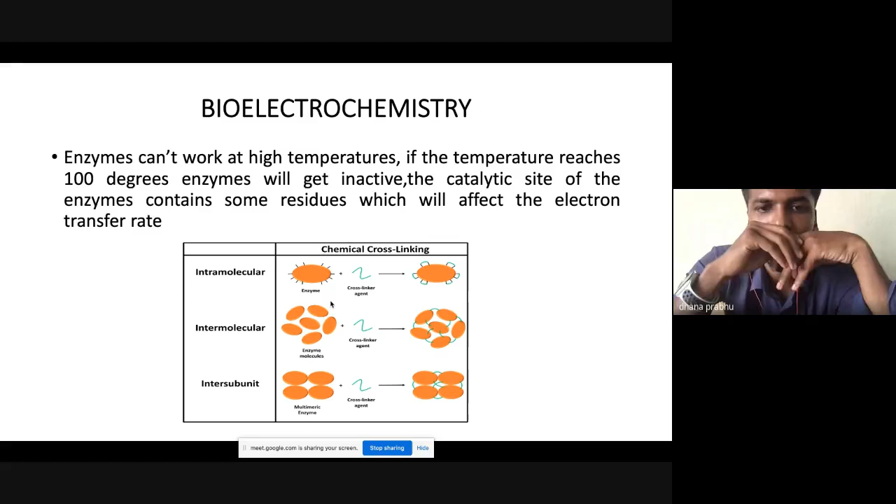So these are the enzyme locking, that means immobilizing techniques, where the crosslinking is intermolecular and intersubunit. When temperature is considered, it is a bioelectro process, and the enzymes cannot withstand higher temperatures. So we are using it as a combined one, because individually they cannot withstand the temperature. So we combine and bond them so they can immobilize and also withstand the temperatures. So we are going for a cross-linker agent to bond it.

It's layered structures and polymer matrix. As we already told, the layered structures mean we are using the enzyme, mediator, and the electrodes. In the layered structures we have monolayers and multi-layers. In the monolayers we use a single mediator for the transfer of electrons. In the multi-layers we can use 2 to 3 mediators which can transfer the electrons.

But we have to consider each mediator, meaning which mediator we are going to use for the first one and the second one. It's like a sandwich-like appearance, so we have to maintain the enzymes and mediators in a particular manner. For immobilization and for better performance, we can also convert the amino acids. We can change the amino acids through the directed mutagenesis process.

Through the direct mutagenesis process, we are changing the genes of the enzymes. When the genes of the enzymes are changed, it may resist something, it may change the resistance of the current at the active centers.

So we are going for the direct mutagenesis process, and also amino acid substitutions, which is used to change the properties. And we go for amino acid removals, which also resists some current densities, meaning it changes the resistance of the current densities and the movement of the electrons.

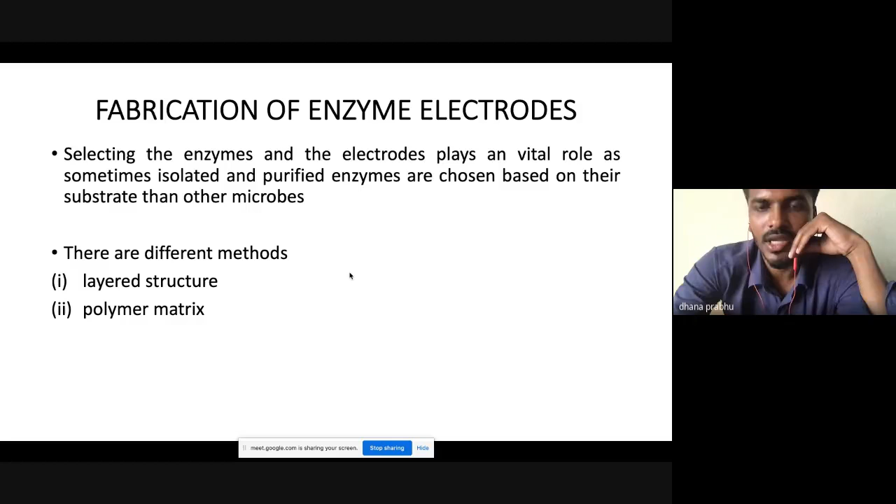So we have considered three things: direct mutagenesis, removal of amino acids, and amino acid substitutions. All three will change the properties of the enzymes, and when the properties change, it will change the immobilization property and the movement of the electrons.

Through different papers we have gone through that. We have considered glucose-based biofuel cells. When time increases during the biochemical process, we already discussed which method we use to stick the enzymes with the biofuel electrodes.

So next we used immobilized GOX, that means glucose oxidase, and immobilized and cross-linked glucose oxidase. We used the immobilization process with two methods: entrapment and cross-linking, like chemical reactions with the molecules, and we are cross-linking the process.

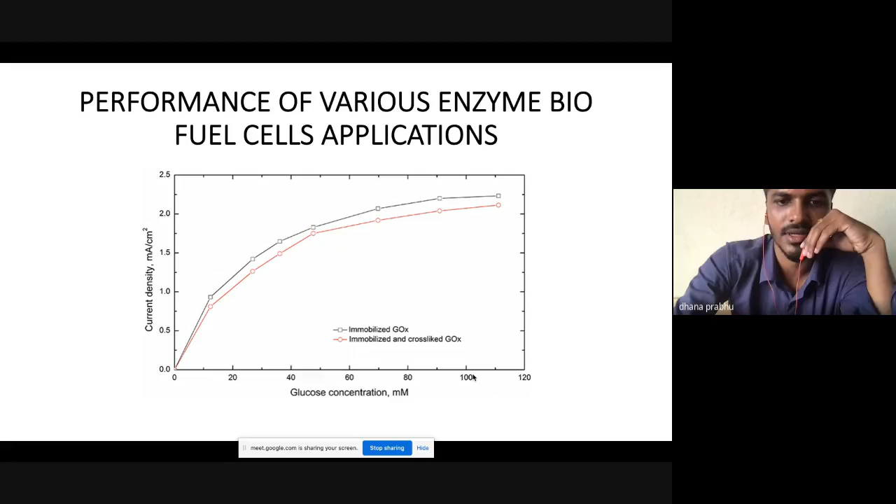Okay, Dhanaprabhu, it's a nice work from your side. So what is your contribution in this work?

Sir, we have reviewed the papers and we are going for a prototype, sir, but due to lockdowns and all, we can't proceed with that. So we will slowly move on with that, sir.

So you registered a PhD under Dr. Ramesh? No, sir, not yet, but we are planning for it, sir. Okay. So that means this is not your PhD work? No, sir.

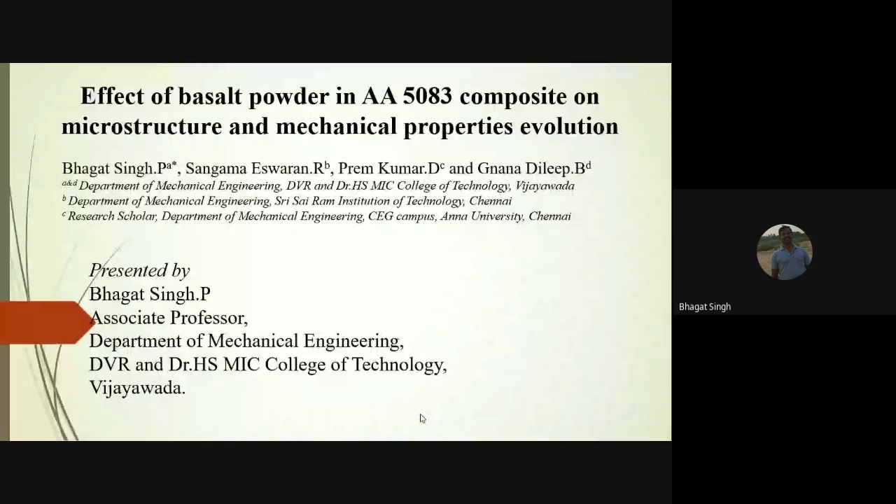So the presentation goes like this: the introduction, objectives, applications of MMCs, method of production, composition, dimensions, and results and discussion. We know people are aware that the major advantage of composites is very high strength, and if you go with aluminum-based metal matrix composites, that gives a wide range of advantages, like in terms of strength to weight ratio. By manipulating the alloying additions, we can improve the mechanical property together with corrosion resistance, so that we can have a better range of applications.

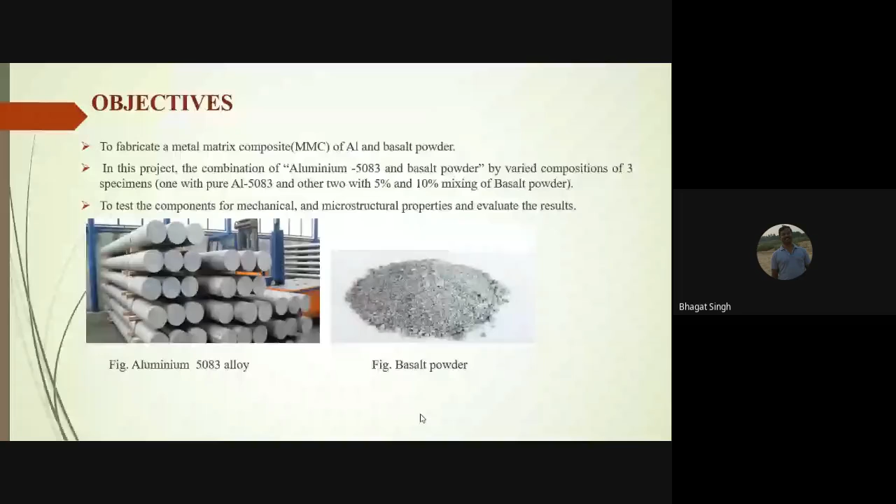So the major objective of this research is, like I said, we are going to work on the metal matrix composite, but in this research we are going to choose basalt powder as the reinforcement. So what is the thing about the basalt powder? What are the things which are not present in other reinforcements, and what is present in the basalt powder?

So you can take that rock. Generally the basalt powder is taken from the basalt rock. Once you take the rock, you can just crush it under the press, and you take it as a powder. This basalt powder can be added into the molten mixture of any material, and you can make a composite very easily. This is significant because you can get it very cheaply, as well as the availability of ceramic particles inside this basalt powder.

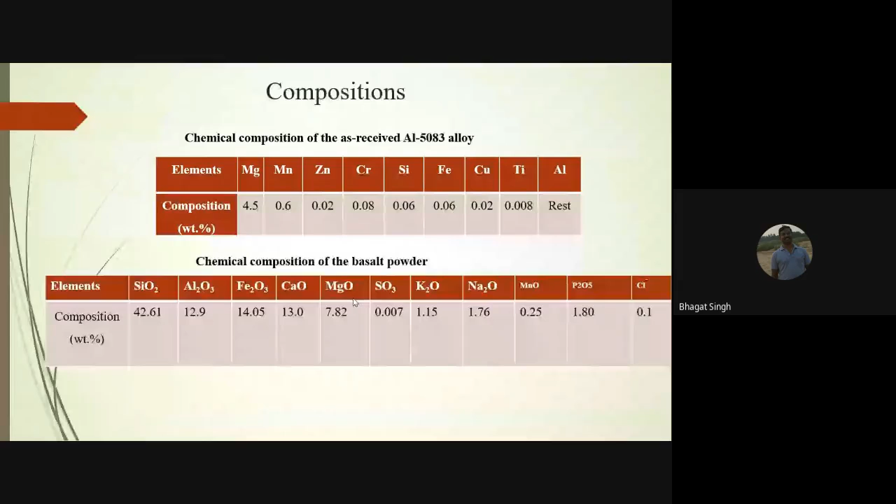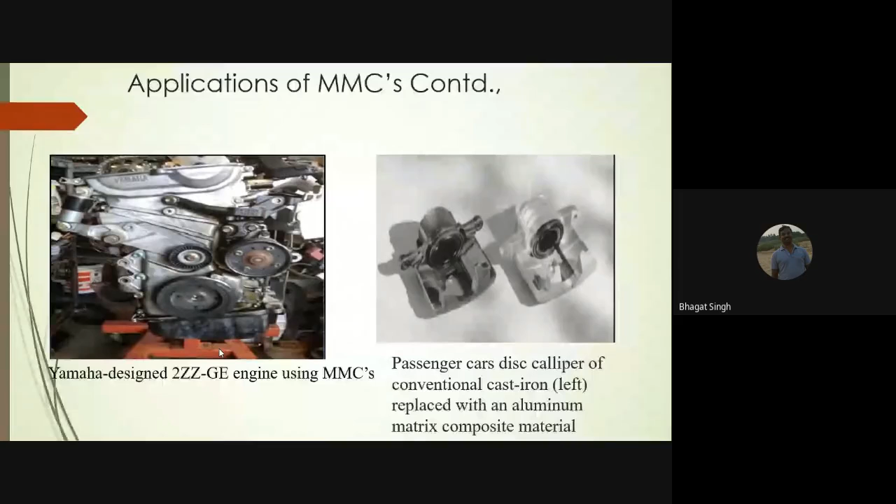So in order to add one more feather to aluminum-based composites, we are working on the development of aluminum-based metal matrix composites using basalt powder. For this we have used the stir casting technique.

But here we are using the stir casting method, which is very conventional and very effective for making aluminum-based metal matrix composites, especially when going for manufacturing of very complex parts. This is the major advantage. If you are making any automobile engines, we have to use the casting method - there is no other manufacturing method available for that. So here also we have used the stir casting technique, which is a very well established technique for manufacturing composites.

Then the crucible is heated above the liquidus temperature. For this work, we have heated the aluminum 5083 alloy to 700 degrees Celsius. During the heating of the base material, we have preheated the basalt powder. So what is the need for the preheating?

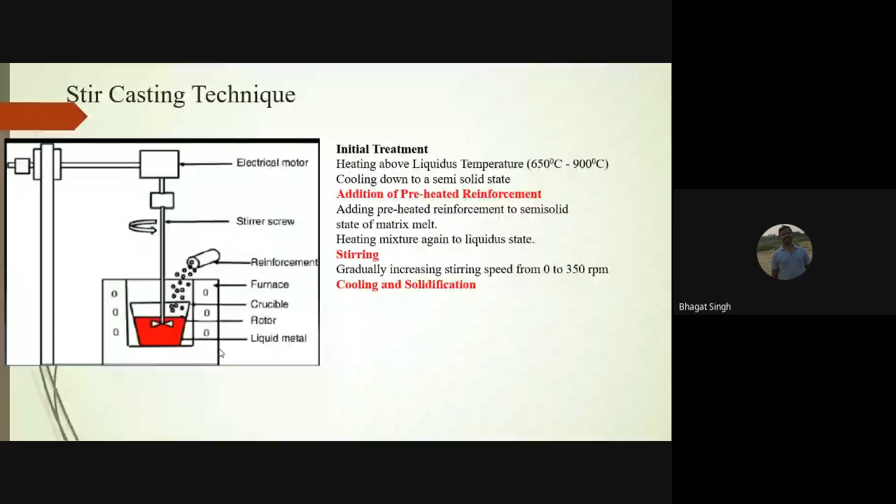Then we started to stir. Once the molten aluminum is ready, we have added the basalt powder. Once the stirring is happening, the basalt powder is completely mixed homogeneously. We stirred for nearly 15 minutes. These are the setup - once the aluminum is melted and we have added the basalt powder, after that we have poured it into the die.

After that, we followed the same process for all 3 compositions. We have taken the basalt powder at 0%, 5%, and 10%, and poured it into this rectangular die.

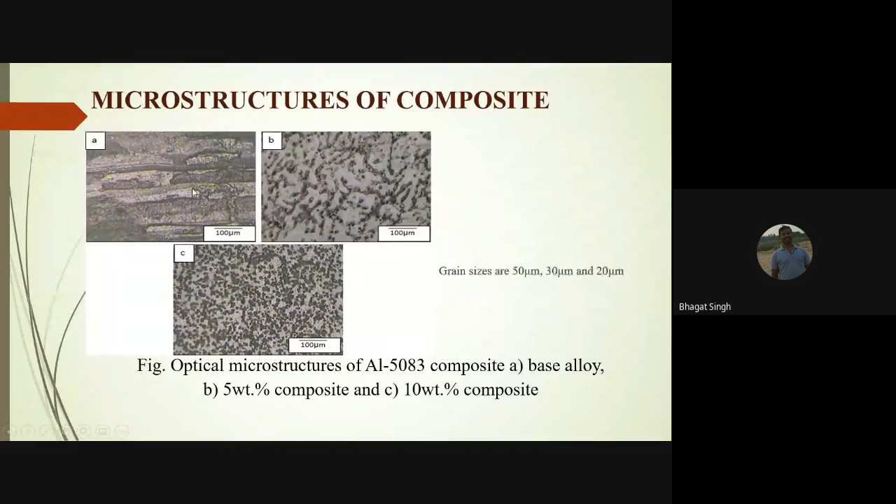Once we started with the microsection analysis, this is where we can see whether any kind of action has taken place by the addition of basalt powder. We can see the base material has very coarse grains, but once we add 5% basalt powder, the grains have been refined very much. Looking at the microstructure, the grains have also been refined. In the case of the initial microstructure, the grain size is only 50 micrometers, and as we keep increasing the basalt powder, the grain size has been reduced - you can see fine grains up to 30 micrometers and 20 micrometers with the addition of 5% and 10% basalt powder respectively. So what we expected has happened.

Hello sir, let me check the network issue. I think there's some internet issue it seems. Yes, okay.

Okay, maybe up to 3:45 we can, if you want, engage one more person. Otherwise we can wind up, no problem.

Okay sir, Dr. Rakesh Singh sir. Sir, Dr. Rakesh Singh sir. He is searching his scholar, it seems. He is not present here. Yes sir, yes sir.

Rakesh sir? Yeah, Nishant scholar is available. One of the co-authors will present the papers, sir. Yes sir, he is not available, it seems. He is not available, sir. Yeah, he is available. Is available? In the name of? He is available, Nishant Kumar.